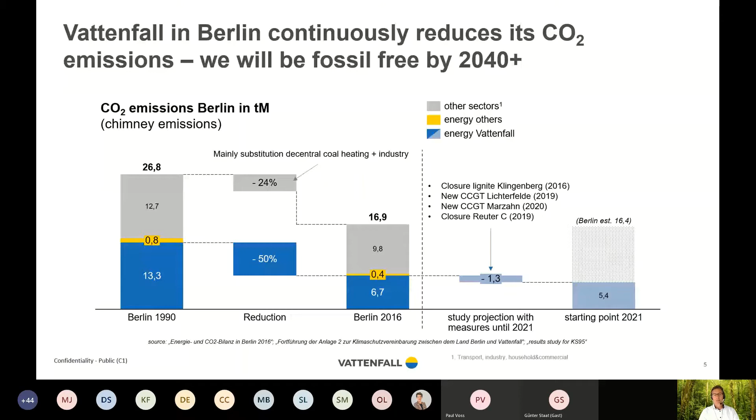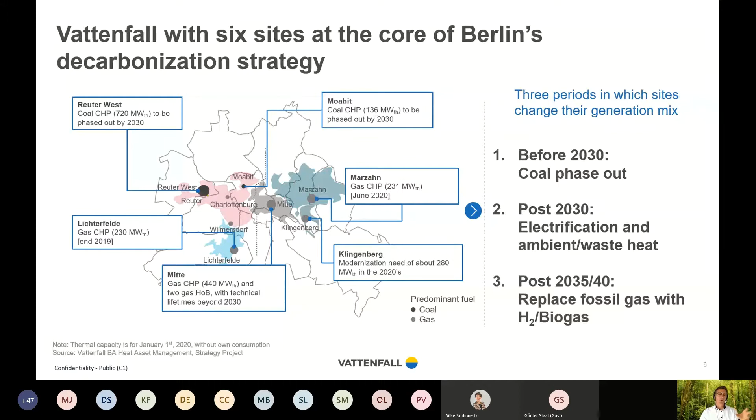You saw the picture also with Paul and myself in the beginning, and this was, as you can see on the upper left side, a plant which we took into operation last year. This is a power to heat facility, located in an area in the northwestern part of Berlin, where we have the pleasure to integrate our own premise. This is this green area, where today we also have this Reuter West hard coal-fired plant.

But there's also this blue area, which is a sewage, so a water cleaning plant, where sewage water from the city is cleaned. And then there's this orange part, a waste incineration unit from the waste collector company of Berlin. So this is where we do smart sector integration, because we have already built this power to heat facility. We are just in the preparation of a final investment decision for a large heat storage, 50,000 cubic meters of hot water heat storage.

And we have just recently signed contracts with this wastewater company, where we will build a large-scale heat pump with a capacity of about 30 megawatt thermal plus X. It depends on how much energy we can really take from this cleaned sewage water, which we will transport with a new pipeline, to be built along the river Spree and then over a bridge to our own premises. So that's a building block of this replacement of the hard coal-fired plant.

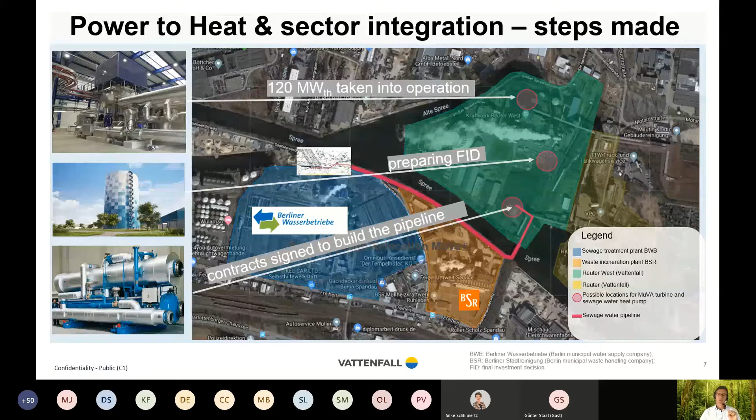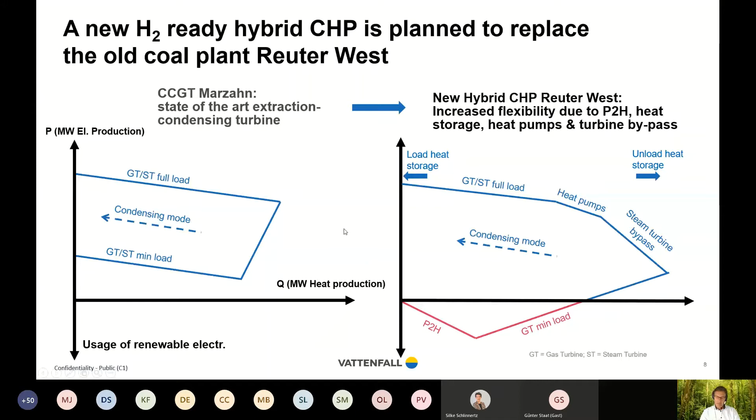So we plan to have an electrolyzer, produce hydrogen at site, store it at site, mix it with natural gas coming from the high pressure system, and then test the turbine, this Siemens turbine, which we have there, and which is capable to burn up to 27–30% of hydrogen. And there we think that this is something we have to do in the near future to prepare ourselves for a situation in the 30s, 40s, where hydrogen becomes simply a part of the overall gas system.

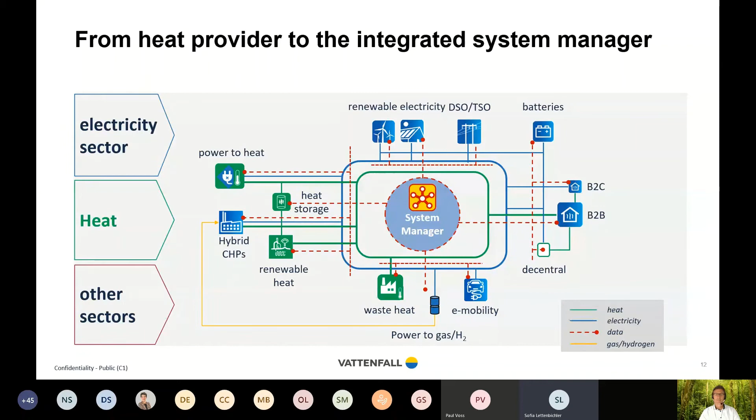So the first one comes from Chris, and he's asking, you mentioned turbines are capable of 30 to 40% hydrogen and 70-60% methane gas output. Do you also consider turbines that can do 100% hydrogen or 100% methane gas output? Yeah, exactly. That's what we do.

As I said here on this slide, which you now see again, hopefully, we have taken into operation this CCGT on the right side, in the eastern part of Berlin, Marzahn, and there the supplier, which is Siemens, told us that up to 27% of co-firing of hydrogen is possible without really significant adjustments to the turbine. That's okay-ish for now, of course, and there is no hydrogen available right now on the market, so that's a start point.

But if you look to the left side, Reuter West, there we indeed plan to look into turbines which can burn minimum 50%, or with some modification, where the supplier already has, let's say, a development path available, so that we not just do 50, but maybe even up to 100% firing with hydrogen. Yes.

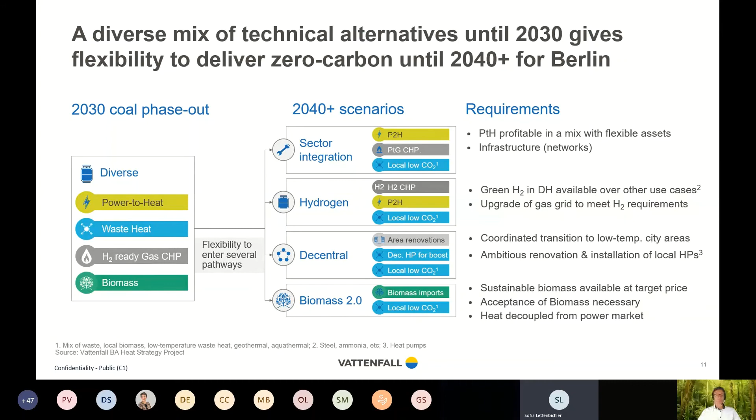Okay, thanks, Markus. Yeah, Markus, here's Roland. I can support you. 20 is fairly correct. Yeah, good. Thank you, Roland. But this was maybe only half of the answer. The rest, what else? The question was a bit more, right?

Yes, about the annual electricity consumption. Yeah, that's the 20 terawatt hours versus the about 31 terawatt hours heat consumption overall. Yes, but that's it. The question was about the ratio, but I think that's fine. Okay, good. I thought there was more.

No, thank you. And the next one is coming from Elena, who would like to know more about the excess heat sources. So her question is: is the use of excess heat sources free of charge in Berlin? For example, the heat from sewage and steam from incineration?

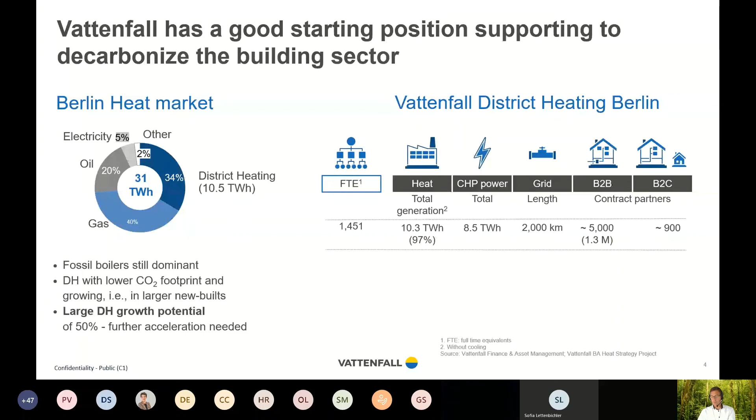So this project is a kind of pilot, a lighthouse project, to prepare our organization, our colleagues in operations in this plant, to handle this fuel hydrogen, which has much different chemical and also physical Eigenschaften, properties. Yeah, exactly. Which you have to learn to handle. So that's the idea behind this project. It's not meant to be, as the colleague said, used as a fuel cell.